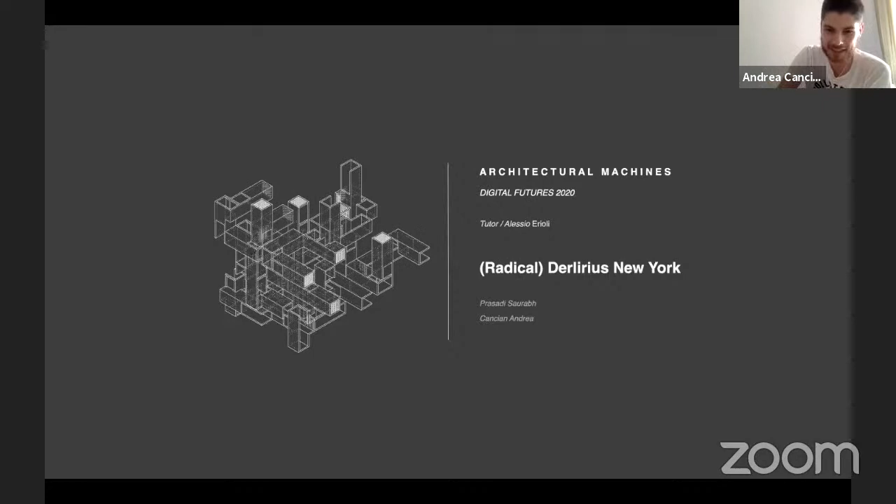First of all, the title came from a book written by our dear uncle OMA, aka Rem Koolhaas, and as we developed a radical approach to the city of New York, we opposed this name. It's just to remind everyone that we are working there in a radical way. New York has been taken as a testing ground for many experimentations, mainly in the 20th century, like Le Corbusier or Superstudio.

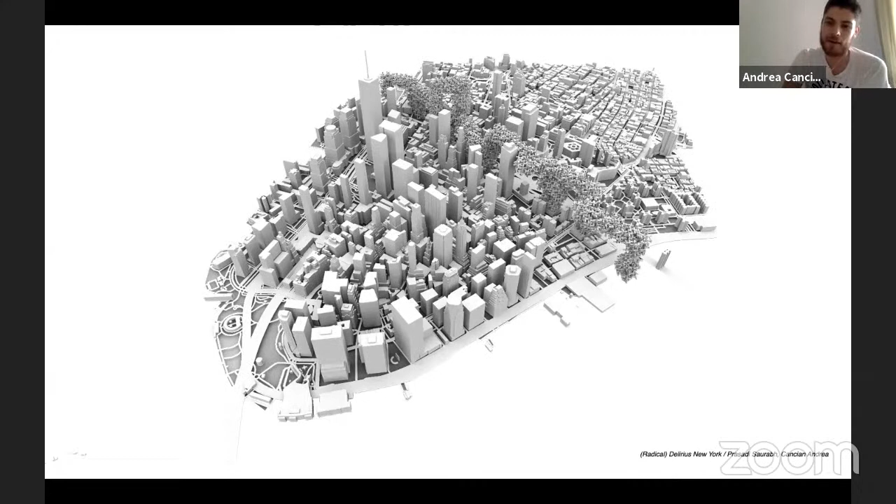We took this occasion to develop something on an urban scale, a very big urban scale, trying to create this superstructure that has been able to flow around this part of Manhattan, actually the arrow of this island, with a module based on a flat scale. This follows a specific path line and a bounding box that we created, taken as an example of the Superstudio shape.

This is fitting on the top of the building or in the water, and at the same time also in a free area of this part of Manhattan, respecting the pre-existence and going around, never colliding with it.

So as I said, we developed this superstructure following two things: a vector field direction, vertical for the legs and horizontal for the upper displacement, and a 3D complex polyline for the main direction.

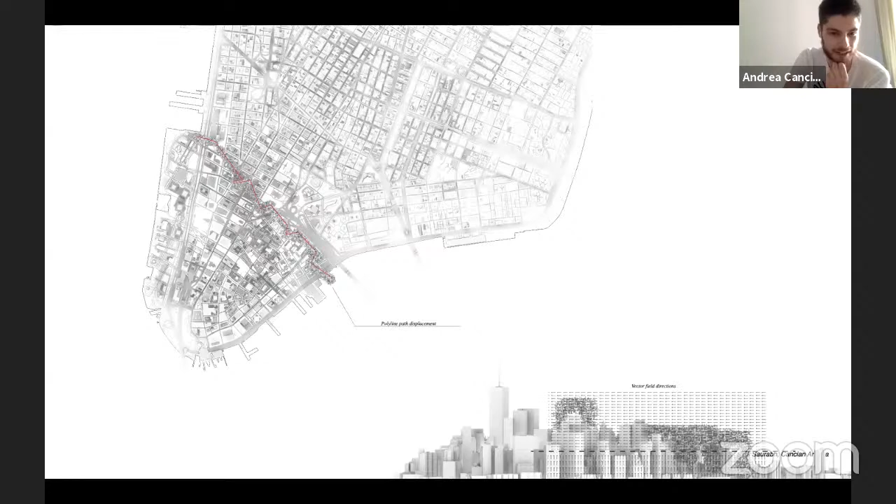These were the three main modules we used, two for the main development, and the last one is the post-production element. We just added some ceiling and vertical closing to this enormous habitat. Actually, as you see, we reached almost

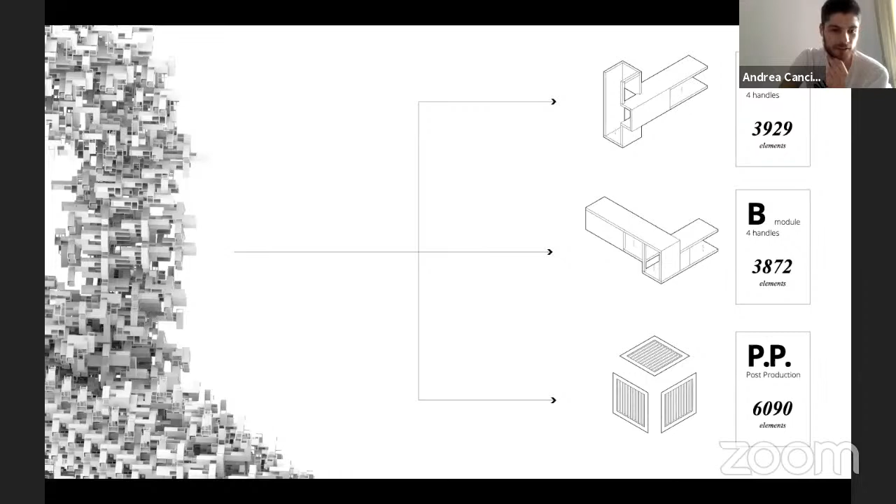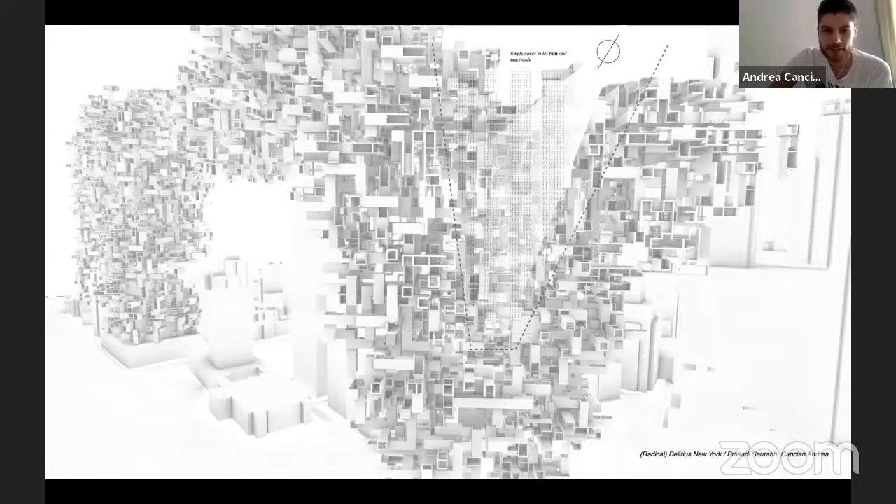it was still able to develop this kind of structure. We also worked with a cone void inside the structure to let the rain and sun pass through, or at least get in, as the density was sometimes too much for the inside element. These are just views that let you understand the scale of this module and of the superstructure in general. All the cubes, the starting element, was a cube that has 4 meters per each direction.

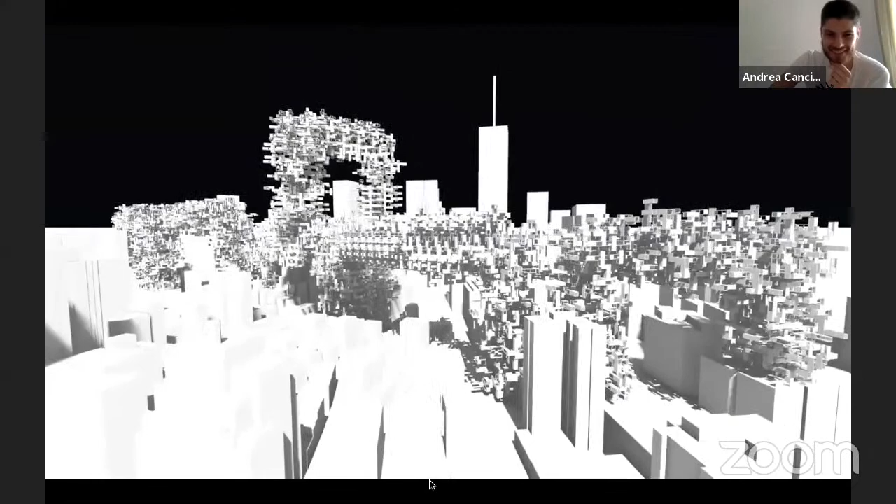So that was all, and this is the final video, a fly through around this beautiful city. Because of time problems, we were not able to develop a better video with music, sounds, effects, and birds flying, but we still like it. Okay, thank you very much.

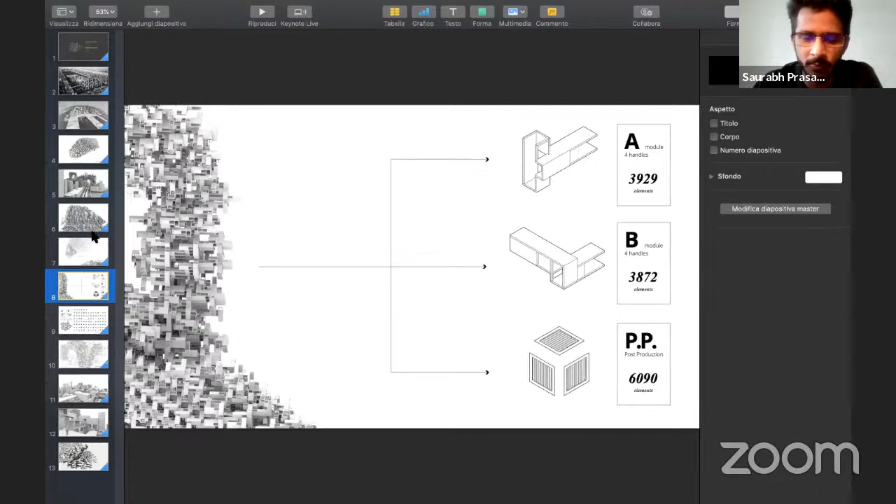So we placed a rule that we wanted to place only the post-production elements based on the directionality of the component that you selected. For example, right now we have those placed only on the right side corner of component A, and also the right and left side of component B. The rule was based such that only on the horizontal components would we have some kind of enclosure. And the vertical components stay open. So this was the only post-production rule that we managed to apply at this point.

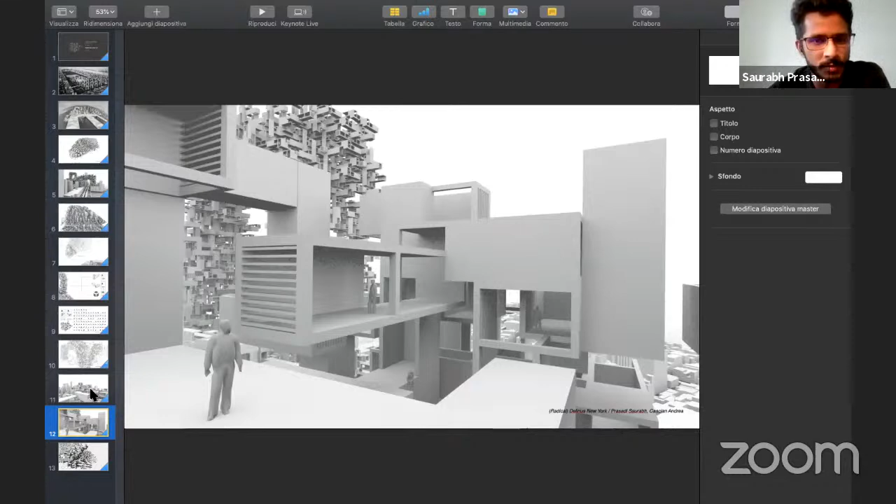The other intention was to cap the tops based on their position on the curve that is running through the heart of the city, but that is still under construction. We are not quite able to get to the point where we apply it on the superstructure.

Okay, well, very interesting work. I was expecting a completely different scale, so I was impressed by the type of project, and I think it's an interesting vision of a city. I wanted to ask more information about the strategy you used in order to populate those modules inside that area. I understood that you are using a polyline for defining the specific area, but then you mentioned two vector fields, one horizontal and one vertical, if I got that correct. Yes. And one is affecting the generation of the vertical connection and the other one the generation of the horizontal. If you can elaborate a little bit on how those vector fields are affecting the creation of the system.

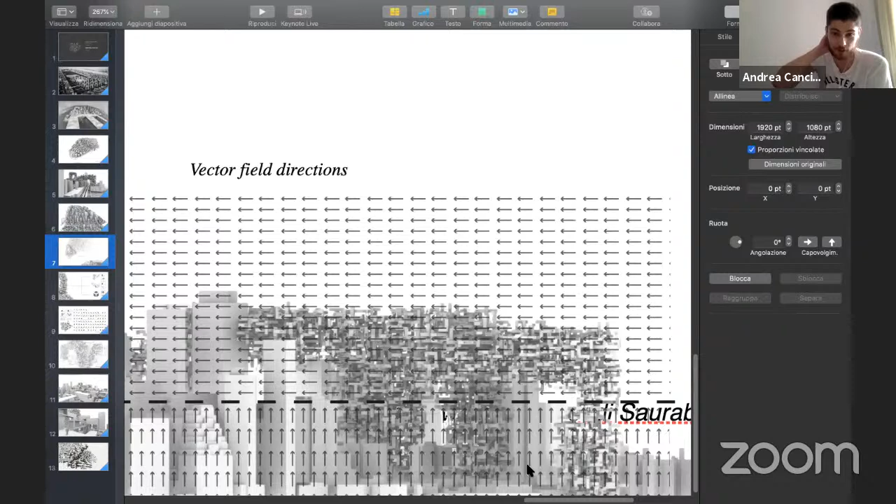Okay, now I see. Sorry, because in the presentation, the vectorial graphic didn't appear in a good way, but I think the image explains it enough because I don't know what else to say. Actually, it's just like this: from the bottom, one vectorial field goes up until a certain level where the legs start colliding with the polyline, the horizontal part of the polyline, and then we change the direction of the vector field to horizontal to have a better development of this module, as they work better in the upper part horizontally instead of vertically. The intention was quite simple, as you saw in the slide where you see the context and the controlling points.

Here, this? No, here, this one.

The intention was simple: wherever there are more neighboring vertical elements, almost in the central part and around the legs on both ends, we tried to apply vertical directional vectors, so the feeling on the ground is more directed towards the z-axis. The more you go to the flatter part, like the whole bridge, there we applied the horizontal one.

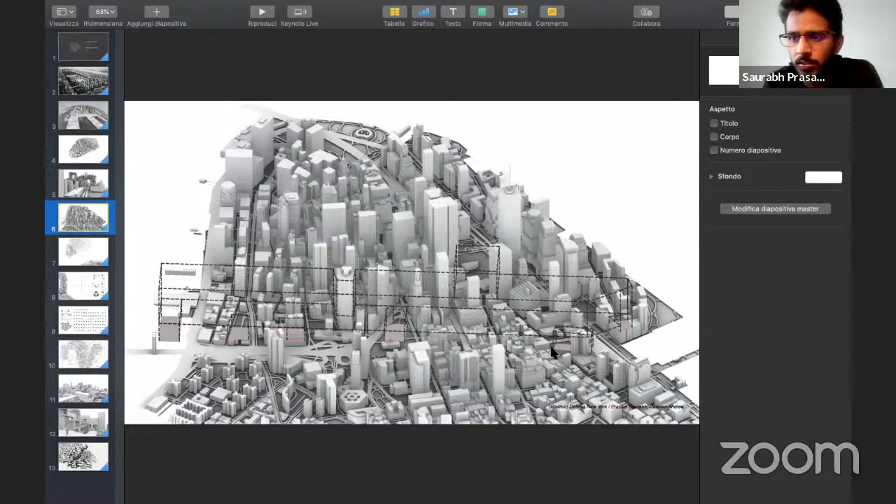So on the superior part are there only horizontal elements? There is of course a contribution of both, but we tried to place the rule of more horizontal on the superior part. Okay, so it's a kind of affecting the quantity, the percentage of different components that you have.

If I may intervene to complete the answer and give information to the guests, the system can be affected in many ways. It grows iteratively, assembling one component after the other, but then you can affect the choices the system makes using scalar and vector fields.

The scalar field tries to place components in the field, which is distributed in a three-dimensional space. With the scalar field, you try to place components as close as possible to the threshold value you feed to the system, so you go for ISO values in the field or as close as possible to those. With the vector field, you try to select the component that is closer to the direction of the vector field at that point.

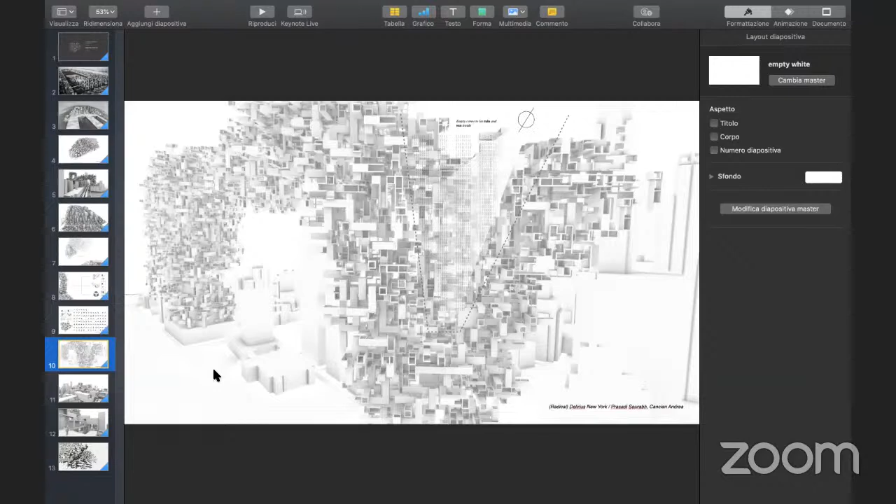So really, placing a horizontal vector field means that the system... we lost Andrea, I think. Well, he will try to join again. It means that the system tries to comply as much as possible with this need for horizontality, but it doesn't mean everything will be horizontal. That depends also on the rules that the system has for growth.

Just to complete the picture of what they have to do. No, now it's completely clear. Sorry, it was not intentional. Yeah, no, don't worry, Andrea. We trust you, Andrea, don't worry. It's fine. I think it's a different project. No, I think it's a very interesting object.

We mentioned the time constraint that unfortunately we all had during this event, but I'm wondering if you see further development for this object, if you got some ideas that you weren't able to do because of the time limitation, if you have many ideas.

The foremost thing was to constrain it on the topmost members. Right now, all the members—the unit on the middle, the unit on the bottom, the unit on the top—they are just copied the same. We still want to filter out the member on the top to have some kind of special treatment. We're still trying to figure out what kind of rule we can apply for it.

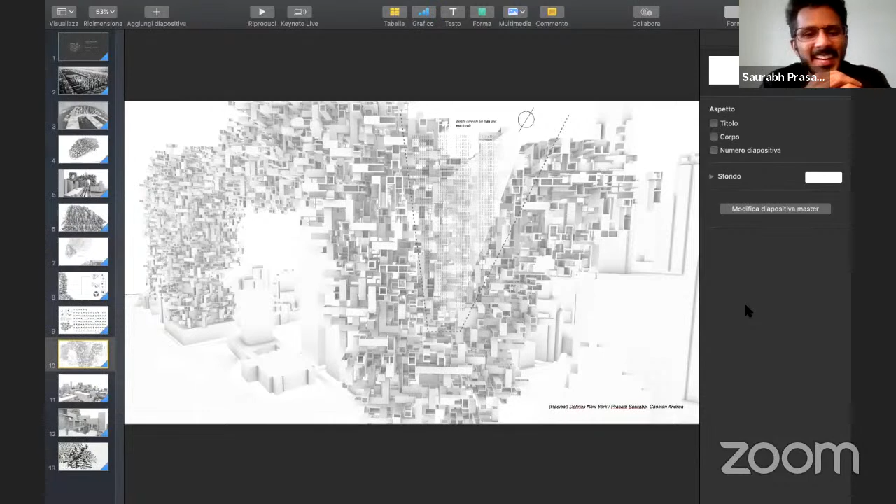Apart from that, we would like to have more constraints in terms of the positioning of the legs, so it's not like a ballerina with a lot of legs. You mean the main connection with the ground? Yeah, we would like to add more where it would be feasible. Right now it's sitting on top of buildings or in a park—we would like to find more opportunities.

And at this point it's also linear—perhaps it would be possible to get it flowing in different points in the city. Interesting.

Thank you, thank you. I think it's a very interesting and challenging work, because as Alessandro was saying, of the scale of course. So I had a few questions.

I wanted to know first if the kind of loop we see on the top left was intentional, or if it was something that emerged from the growth. The top left or in the center, you mean? Go to slide 5, yeah, top left of this slide.

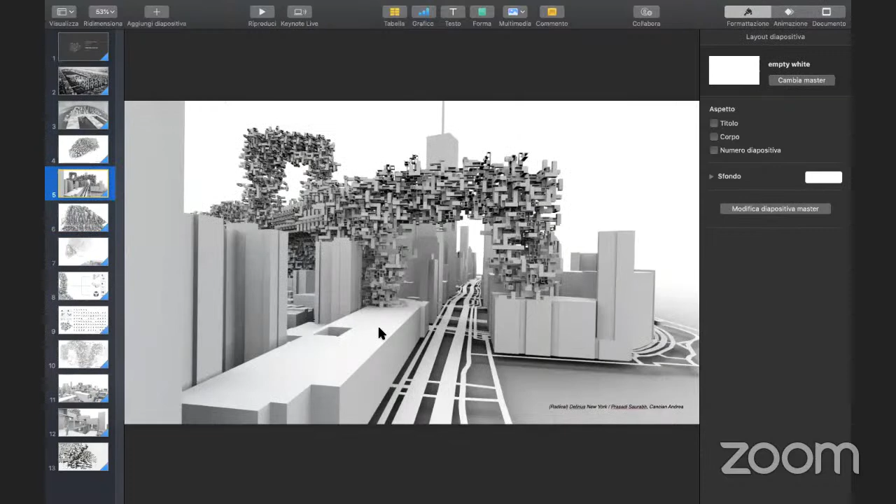When we saw the city as a whole from the aerial view, it was quite evident that this is the point where most of the high rises were turning out to be, and we wanted to respect the skyline of the city and go along with it rather than trying to oppose it with a low rise. Yeah, perfect—in the elevation it's very, very clear.

So in this slide, we see there's a polyline which gives the linear orientation. I get this, and I also got the influence of the different vector fields, but I don't understand how your structure evolved into this kind of arch in the middle. Because it's a 3D polyline. Ah, it's a 3D polyline, okay.

Yeah, okay, so maybe in this case you could show an elevation of the polyline as well, because it's not extremely clear to me. I could have done it, yes. No, just an advice. No, that's interesting, it was just a detail.

So maybe moving on to something more about your actual speculation on this. In your images, you show something more in programmatic terms. It seems to be more like a massive housing project. But you're also referring to SuperStudio, which, as we know, has a kind of absence of differentiation. It's interesting because in your project you kind of achieve maximum differentiation with a minimum number of elements. So I'd like to know your position on the function of this building. Do you see this primarily as a speculation on a massive housing system, or could you see it as a kind of micro city embedded? What are your goals for further development on this aspect?

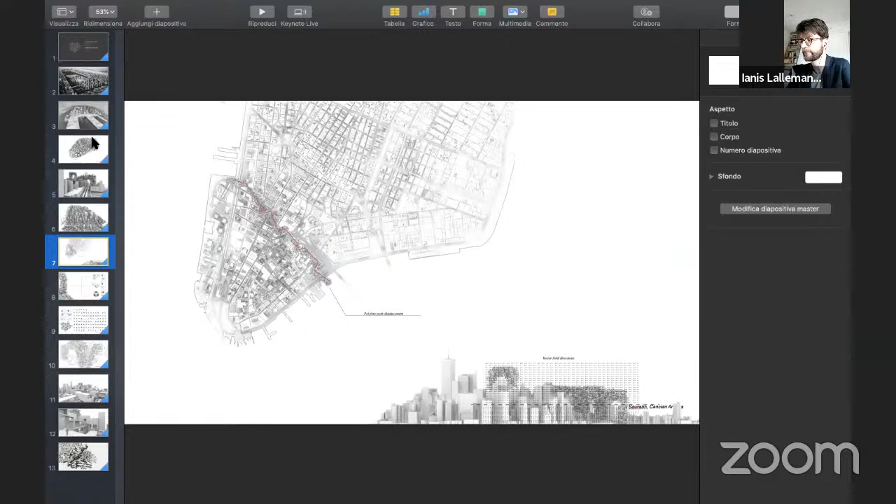The choice for New York is totally provocative, but in the near future we are going to end the spaces to build, and we're going to be like 14 billion people probably. So we wanted to develop this strategy in this provocative way, because maybe in the future we're really going to need this -- almost favelas with a mathematical order, because that's what it could be.

It helps you develop big scale elements. If you want to build it, it's going to bear some major problems. But if you think of a scenario where you're going to have population problems and not enough places to place them, that was our provocative way to show it.

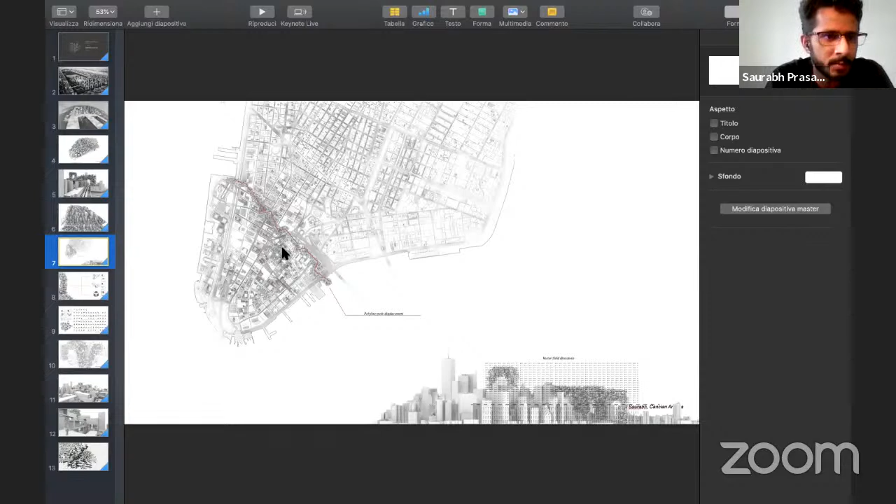In terms of usage, we foresee it having a strong character for residential and office use at the moment, because no matter how dense it gets, it's quite porous. In the 3D view or perspective, it's quite clear how almost every unit is able to get light or access some way. Here he's shown rain falling from the sky, but I think porosity is the strongest character it retains even after being so dense.

This is interesting. I'm wondering, of course understanding the limitations, and this is already pretty impressive work for a one-week workshop, but I'm wondering if you could achieve further differentiation in some areas, maybe by post-processing the components, to play on the opportunities you have with porosity -- maybe some kind of platform zones. I feel this project has more potential as a kind of contained living environment than as a massive housing system.

So you could probably try to embed more programs in a sense -- office, housing, but maybe also platforms or areas for circulation. I know you've talked with Alessio about tools to analyze the path, and that could probably give some insights about how to develop that. But those are just suggestions. Again, congrats, this is pretty impressive.

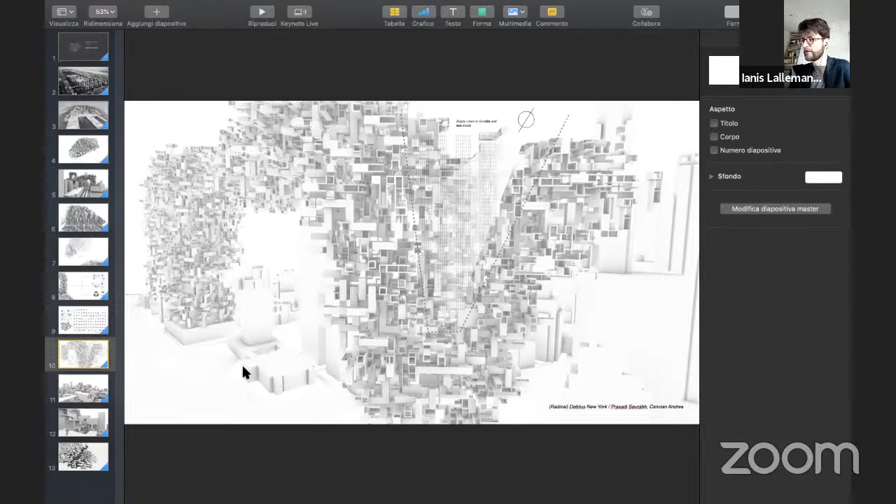It's good you show this reference, but you could exploit the theoretical part of this reference more and connect it with the issues we might face in terms of housing crisis and densification. So I think there's also a lot to develop on the theoretical side of your proposal as well. Very exciting.

If I may pitch in, I think it's a very interesting discussion on the project. We didn't have much time in the previous days to dig into the premises and the intent of the project. Nonetheless, I'd like to say a few things that are important before moving on to the next presentation.

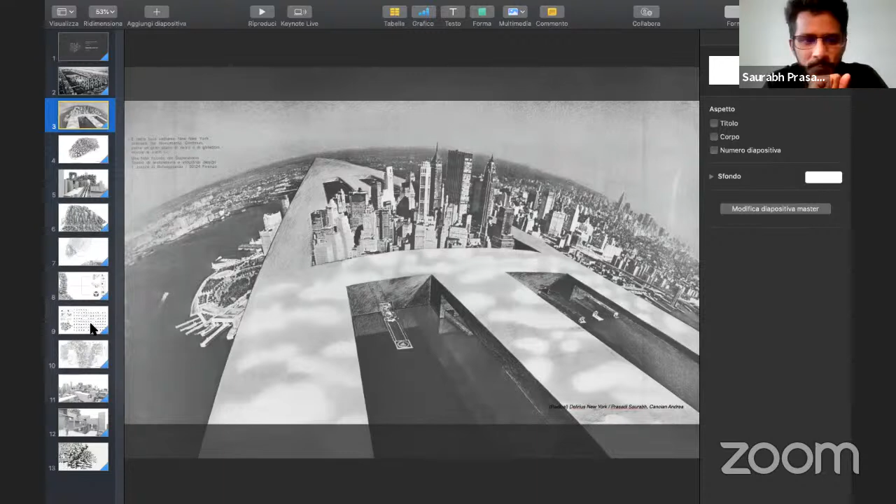Remember the distinction I talked about on day one between unit and component. That's exactly the step away from modernity. I like the references, but you have to understand they are the past. No matter how radical, they're still a proposal rooted in a philosophical and architectural view that belongs to the past and is not to be resurrected.

Of course you have to learn from it, but the fundamental step away is the concept that modernism had of the functionalized unit: one unit of space equals one function. In our case, what you are using are components.

So what Ianis was suggesting is actually something I would have suggested as well: resist the temptation to assign a function to that component from the very beginning. Look at it, because that's a component, not just a modular unit that composes something made only of the same properties. When it combines, it creates spaces that acquire different properties, because the aggregation is open.

So even the qualities and properties of the spaces you're creating are open. And they're open not just to seeing this as massive housing or something, but something that could be entirely rethought, even in terms of what you understand as function, as related to your lifestyle.

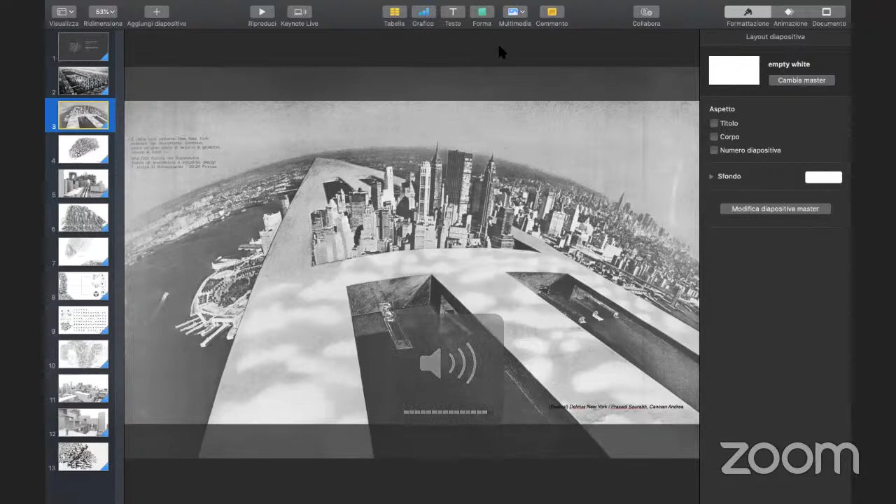I just wanted to add another piece of information for the guests: the scale of the project isn't going to be the same for all of the projects. I actually had something in mind at the beginning of the workshop, but I preferred to leave participants free to steer the instruments they were given towards more personal goals. So you'll see a different range of scales and scopes within the various projects.

But I think it's also more interesting, and I was curious to see where this same approach and process could go if applied to a different range of scales and scopes in themselves.

Coming from the architectural scale of voids, we're talking here about designing not only from the outside, from the mass, but also from the inside, from the spaces which are coming between the walls, the interstitial spaces, or the rooms, or anything which is within.

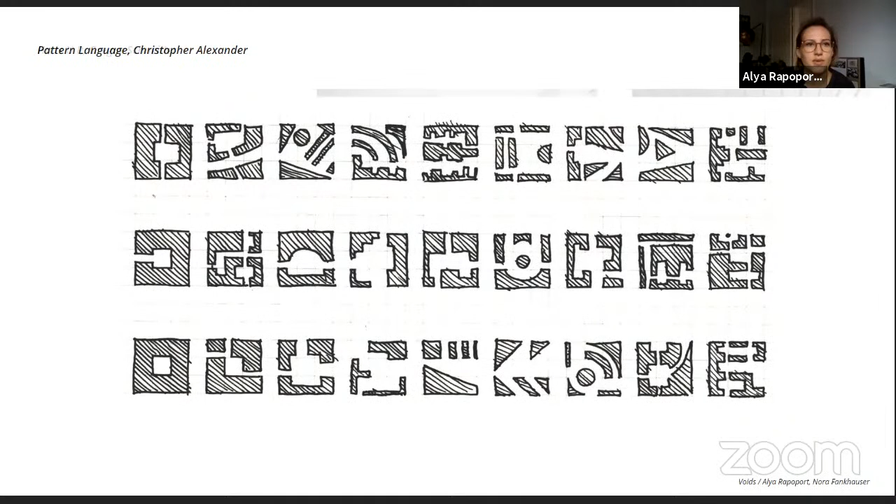As a reference, the Salk Institute by Louis Kahn, or the widely-known pattern language, the seminal work of Christopher Alexander, or on the art side, Haus u r from Gregor Schneider, which he developed to have one layout on the inside and another layout on the outside, creating void spaces between the walls and a feeling of uncanniness being in the spaces.

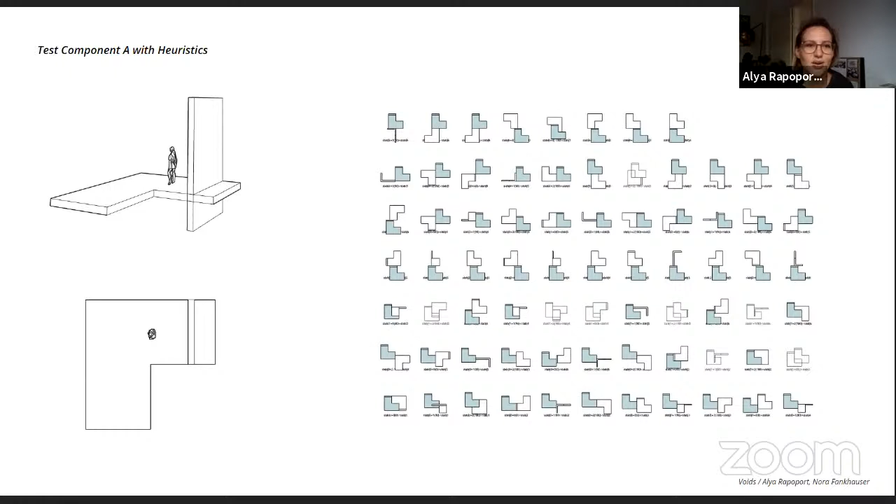So we took that idea of designing from the void and started to experiment with components and heuristics. First we thought maybe we'll start with a component which will contain the void as an outer shell. Our first test was component A, which would create smaller spaces on this side and bigger spaces on this one. We did a heuristics test and thought maybe it would be better to create a second component B, which would work very well with the first one.

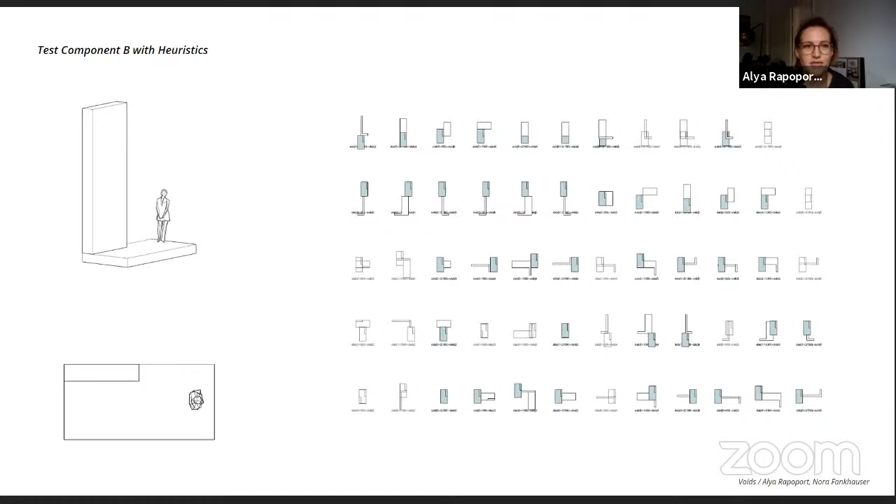Here are the first connection rules that created these nice ideas, not only of void spaces, but also spaces which create a kind of window, a bit more Le Corbusier style, looking outside and seeing through the whole perspective of the space, or seeing that there's a dead end and making it even more curious.

So our first assemblies look like that, based on the occupancy or the sequence.

Then we came to the problem that it was a bit hard to define what is the circulation path if we're going with an element which looks rather from the typology of the slab. So we decided maybe we can create a negative form, a form of mold, and try to create the voids from within.

So we took the first component that worked for us and inverted it, looking at the different heuristics that came up, trying it within the environment in an urban setting, coming back to the notion of how these parasite-like void spaces will actually fill the voids between the first and second rows of houses, with the constraining box of the block and the buildings as obstacles to move around.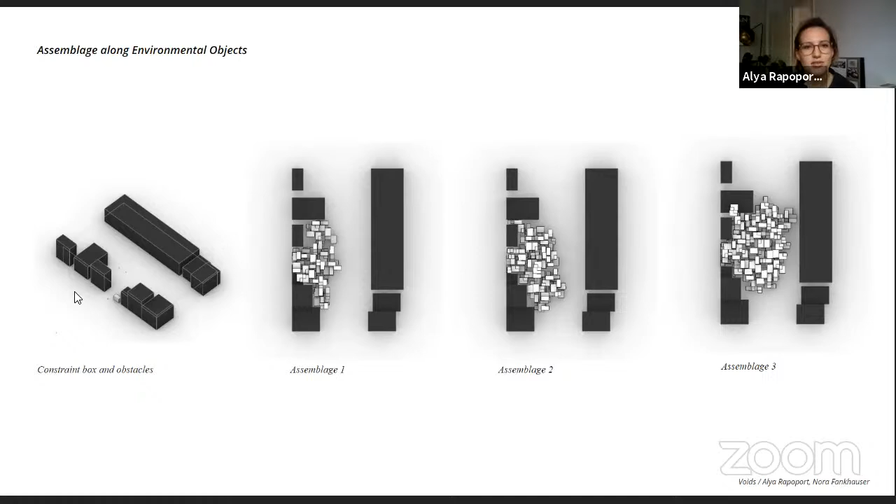Then we tried the circulation curves within this block, but didn't find a really well-working approach for us. We tried a different analysis of the shortest path from one space to another across the different assemblies.

Finally we came to the final aggregation, taking component A with the handles and the circulation path that we intended to have, and creating a void or a box around it. So for our simulation of the circulation spaces, we used the box, also known as a BB or bounding box component, and for the visual aesthetics and seeing how the space would look, we took component A.

This also brought some challenges. First, we took the heuristics of component A, manually picked the ones we thought would be interesting to create nice spaces, and then translated that to these bounding boxes.

From here you see it's a bit hard to define or determine which ones will actually create something valuable.

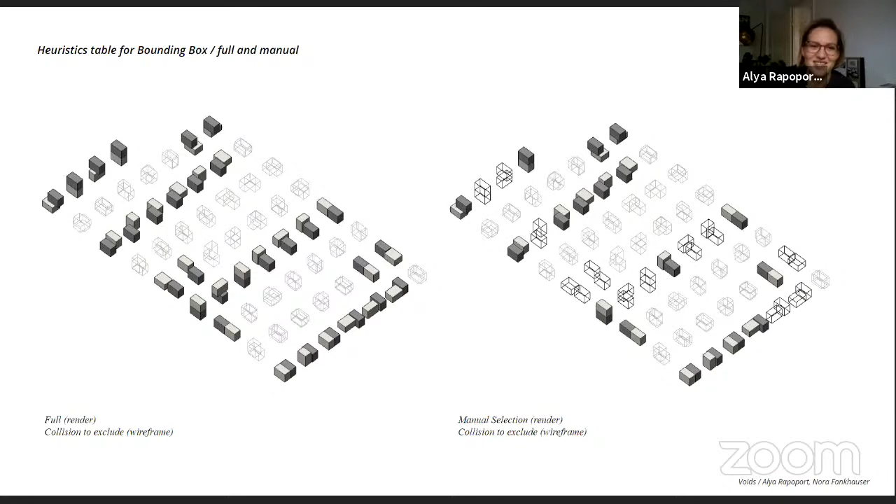From here we went further into the environmental space and tried different assemblages to see how they would behave on a smaller scale as a house, or a bigger scale as part of the blocks, or something in the middle. We analyzed that the difference between free handles and included handles also depends on the surroundings—if you have more houses around, more of the handles are not free but actually occluded.

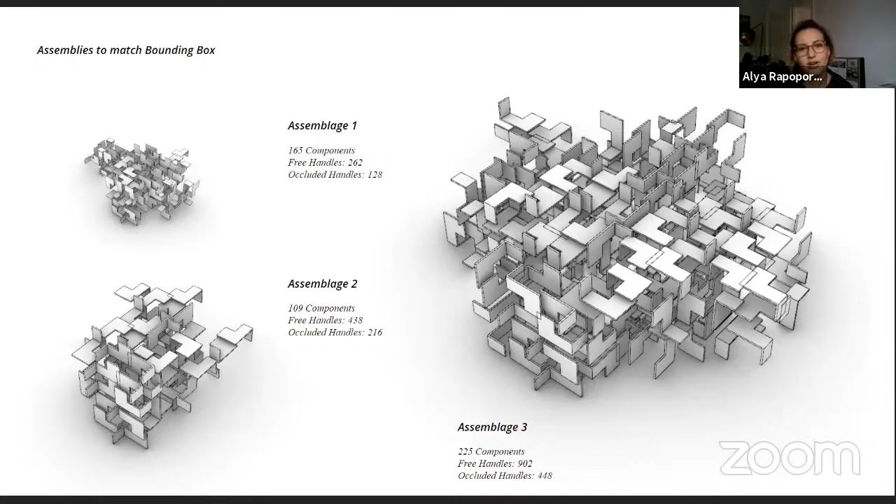Here are assemblages number 1, 2, and 3. They are not iterative, but it would also be interesting to see how an iterative approach in the assemblies of these building blocks would look in the future, or with other constraints of the urban environment.

Here is a short GIF of the options.

Then, to analyze how the connection between these void spaces will function and look, we came back to this component BB, taken with the same heuristics and the same assemblies. We looked at the circulation paths connecting the points at the extremity of each of the boxes.

Here are three of the examples of how it looked. We found it actually super interesting and would be very excited to continue working on that and seeing what we can do with the spaces.

And here are the views from the inside, how that might look on the scale of a person. Some spaces are super big, some are more narrow or smaller—maybe that would be interesting in creating an impression of vastness versus a pressurized environment.

And here is how I would imagine it looking when somebody is passing by and sees this enormous structure. Maybe it could be covered with an actual facade so you don't see what is inside, and only when you enter do you come into this Alice in Wonderland style labyrinth. That's it.

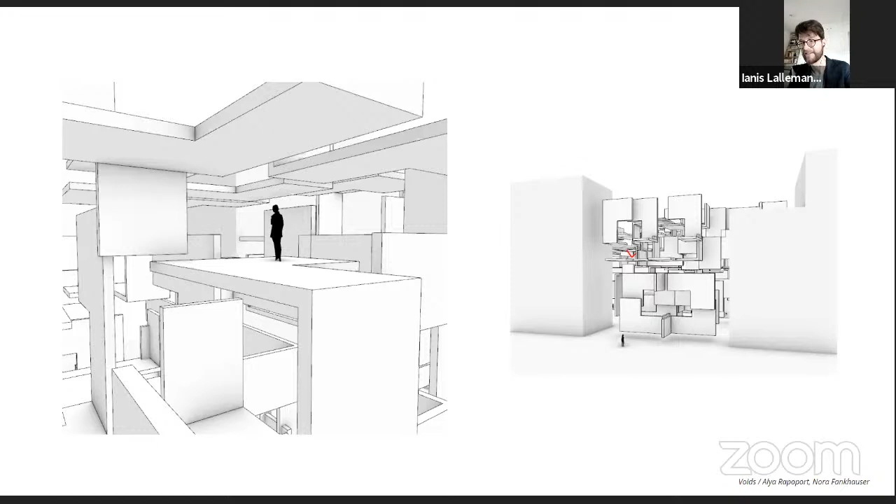Thanks for the presentation. I think it's a very interesting idea to start from the notion of negative space, and I really liked your idea to think of components as positive and negative duals, so that they can work in tandem.

My question is more about the workflow you eventually choose. My understanding is that you're setting up the heuristics exploration with your final components, but then you go to bounding boxes and make the assembly with bounding boxes, and then you go back to some kind of component. Could you elaborate on this part where you introduce the bounding boxes, and why eventually did you choose to do that?

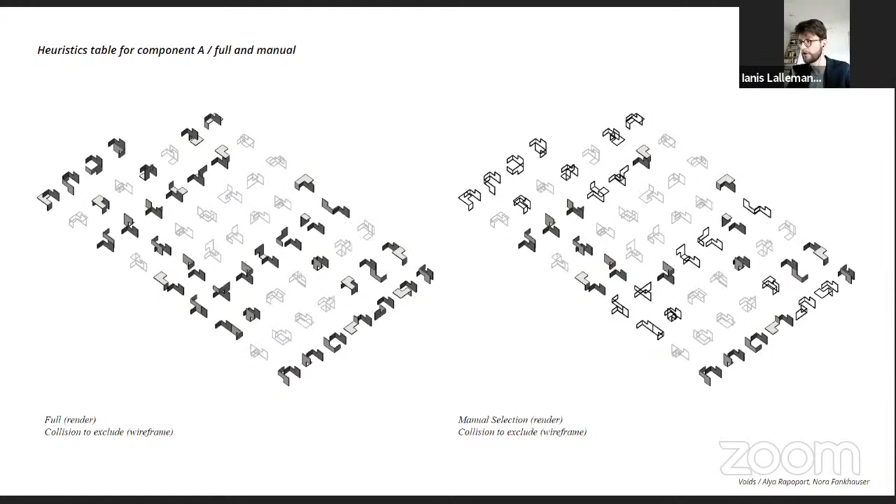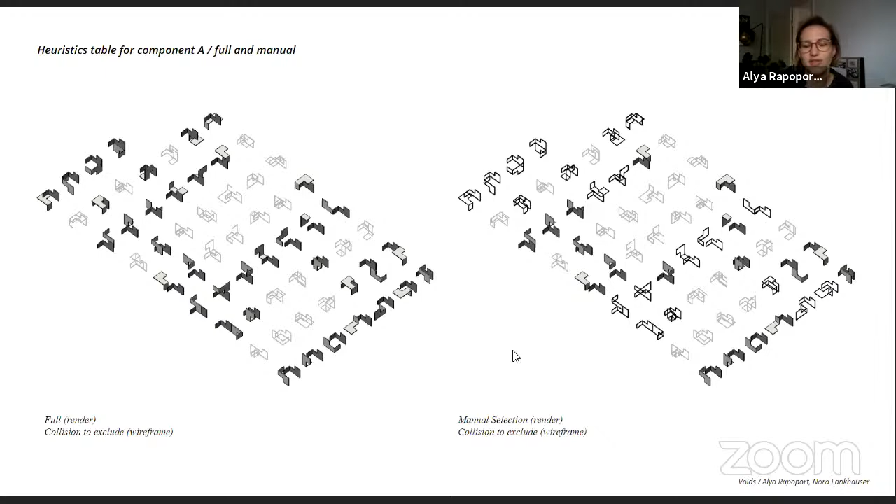Eventually, we faced the problem that since we're creating from the inside to the outside, from the void, we wanted to also see how this void would be connected and which circulation path or exploration path it would take. But in the current setup, the script was not working on a slab mode of the space, meaning we could only do the circulation path if it went from handle to handle, but within the bounding box.

If we're going from the component, which generally looks like a slab, and the handles are more within the space, it didn't connect the way that we wanted. So we did the work twice: we did the assemblage with the actual form that we wanted, but to analyze how people would be moving through, we had to use this bounding box.

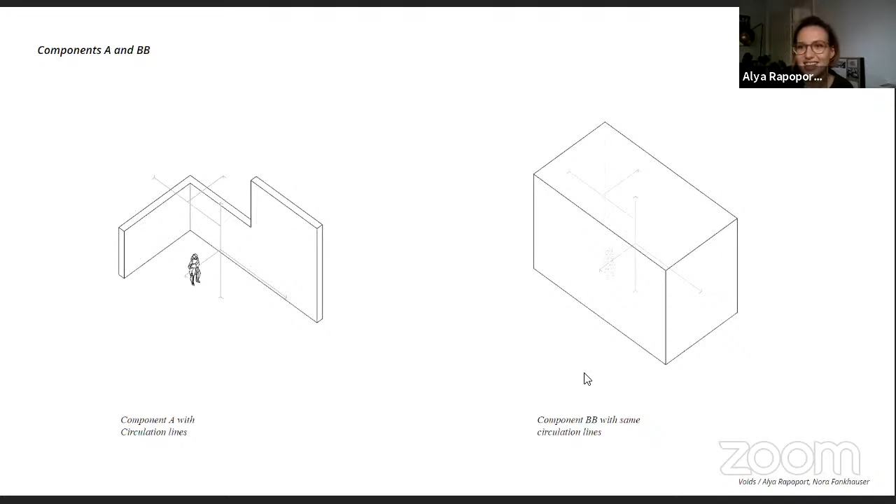But this is actually a super interesting thing that I would like to see develop further, how when we have something that looks like a wall or a slab or this weird flat element, the circulation lines can be adjusted or put into the space according to this element. So this was just a technical restriction we had to follow.

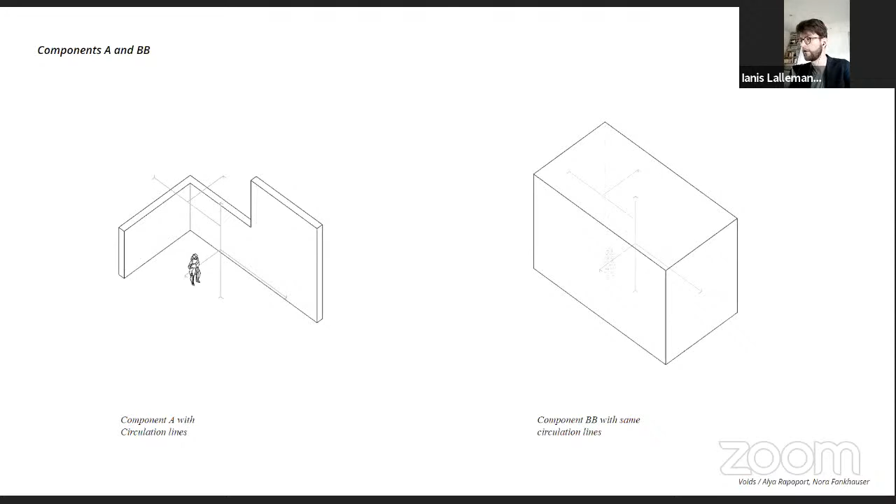Right, but in this case, my question would be, why didn't you start with bounding box modules, explore the heuristics for these modules, and then afterward replace them based on the circulation with more slab-like elements? What's not clear to me—correct me if I'm wrong—is that you generate heuristics for hollowed forms, and then you move to bounding boxes. Wouldn't it be more effective, conceptually and technically, to explore the heuristics with the full elements first, and afterward hollow them or introduce a differentiation? But then you can't predict what it would look like.

We had this in one of our presentations here. If you work with the voids only, then you don't actually see how the connection of the parts will look in the end, and whether the form will be aesthetic or not, in the way that you imagine it to be.

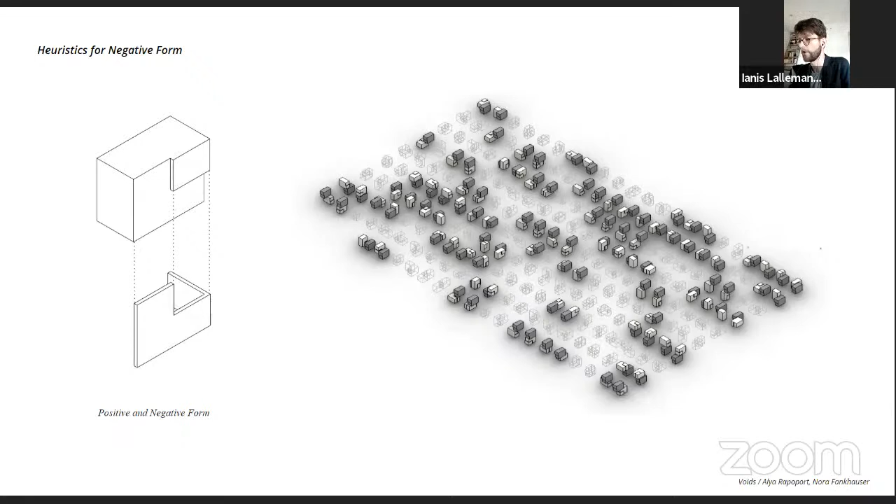No, but I'm especially referring to starting with full elements like this. It seems to me, and maybe I didn't understand it, that you didn't do the heuristics exploration with this type of element—you did it before with the slabs, and afterward put in some bounding boxes. So my question is, why not start with the boxes, explore the heuristics for that, which is also safer for handling collisions, and afterward replace them with some elements? You could always run a small simulation to see how that would connect.

Coming from the void, our intention was to use the one—if you go to slide 20—we had more interesting iterations with the aggregation of component A. So if we used the same heuristic for the bounding box, and then analyzed this, we could not come up with interesting connections.

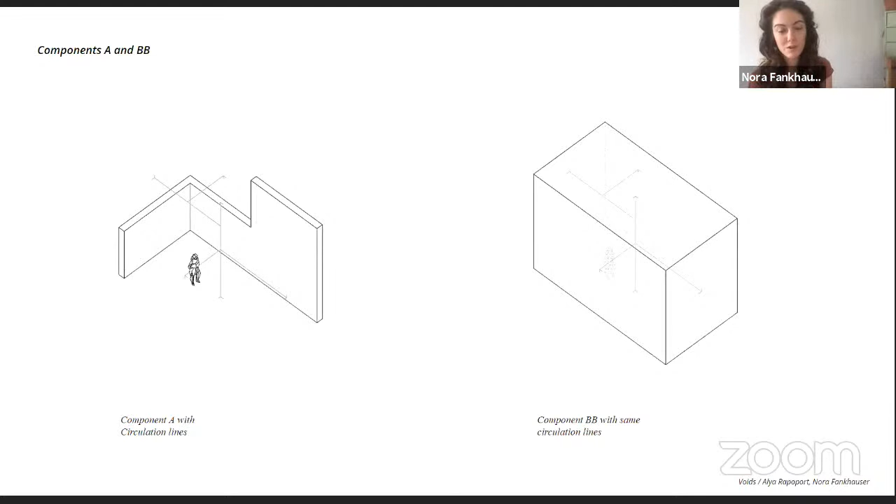So that's why we choose to start from this, to see how these two components combined would actually build another space in between, and then move on to the bounding box, because the bounding box was just a technical issue we had to follow in the end. If we would have chosen the connections from the bounding box, I think you see this on slide 20, the combinations for the two bounding boxes were just not interesting enough for us. So that's why we got back and forth in the end.

But can't you have connection issues? Because if you don't, and that would be my last point, I want to leave the floor to Alessandra as well. But I mean, for me, I think I really understand the process, and that is related to your idea of working with positive and negative forms. But I find somehow there could be some issues.

I mean, intuitively, if you take the heuristics that are computed and pre-selected with some lighter elements, and keep the same exact heuristics for the bounding boxes, I don't think it will always work in my understanding, because the way the system works is also removing the parts that don't intersect. But because those parts are much lighter, if you go with the bounding box, you could have intersection, I think. So it's just that you could keep the same idea, but I think it's also related to the way you work.

So you started with this initial idea, then you faced an issue, and then you replaced them with some kind of bounding boxes. But maybe now that you have more time and you can take a step back, don't start with the hollowed element, but start with the bounding boxes. Of course, you know very well that you are going to end up with the elements. But sometimes you need to restart from a fresh state with a new strategy.

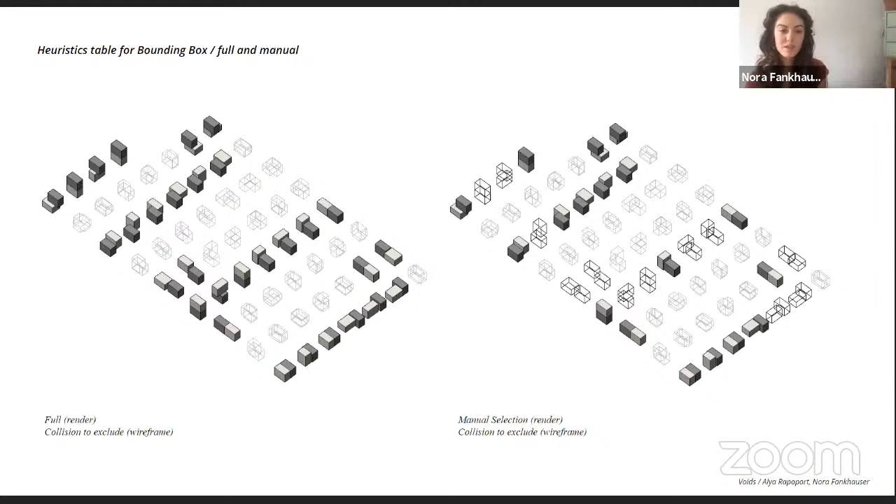Yes, I totally agree. That would be the next step, also to analyze more in depth the circulation path, if it works or not, and different aggregation, radiation. It's interesting that you added the layer to the component itself, and somehow this gives some information. But at the end, probably something else should happen in order to make an evaluation that considers also some possible emerging effect or behavior.

Yeah, that's a very interesting topic. They had some bumps along the road, so they had to go back and forth quite a while. This is why the appearance of the final level of development might appear a little underdeveloped compared to what we've seen before, but the process and the intention were always focused and spot on all the time. I won't go into the questions that Ianis asked, but to me there is still a bit of confusion in what you did with the bounding box, but let's not talk about it right now.

I think the interesting thing in your project would be exactly that challenge we were talking about between yesterday and this morning, which is how do you capture emergent organizational qualities when you start building up. It means recognizing semantic categories that do not exist yet, in a bunch of words. So how do you do that?

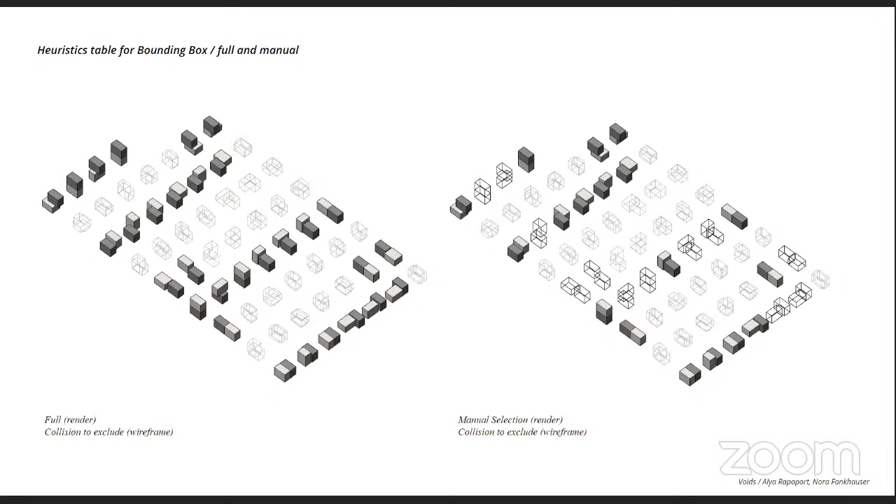We're trying to find the circulation that your component engenders when it creates assemblages. But with a simplified version of the problem, there is something that can be done: building a line network and then working in trying to do something with that line network, also introducing feedback aspects. This is actually one of the things I would have liked to have fully developed before the beginning of the workshop, but I couldn't, unfortunately. I think you already had enough on your plate to work with, still with the strategy we explored together the first two days.

So I think you were going in a very interesting direction. Coming to mention it, seeing the slides of the Salk Institute, just a last minute thought, but maybe instead of something that is that open, another possibility would have been to work in recursive pockets of voids, like a component that contains a pocket that has another void inside it, and see how you can reverse the situation between inside and outside, designing the component in a certain way so that whatever is the outside for one becomes the inside of another when assembled. Just a passing thought, but all in all, I think we've done a good job.

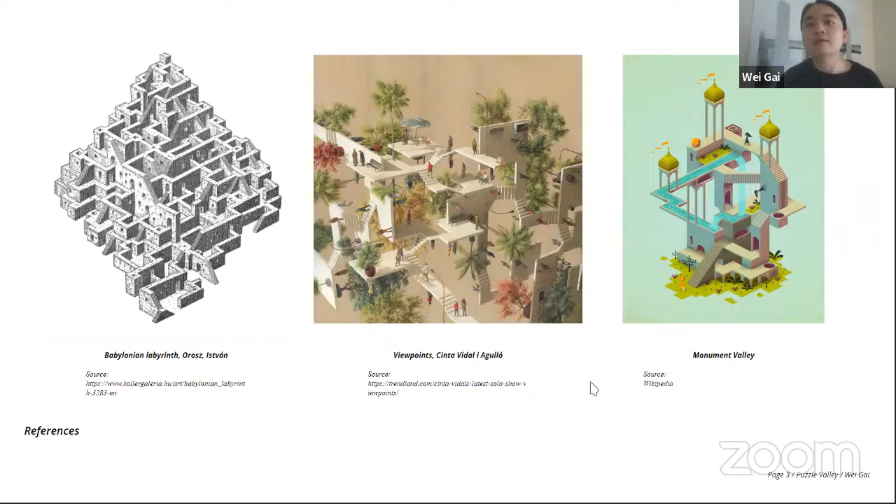So then it's my diagrams. First I will start with a component I made. From those 3 artworks, I tried to find what are the important elements.

So I found one is right angle walls, pieces of the walls, and another one is the stairs, which can be connected to the walls in different angles, and they connect together to make my second component. They collected together, as you can see from the right-hand side.

This is a possible single space made with walls and the stairs. Let me move to, okay, now you can see the page numbers. So you can see from this small single model the scales with the humans and also the stairs.

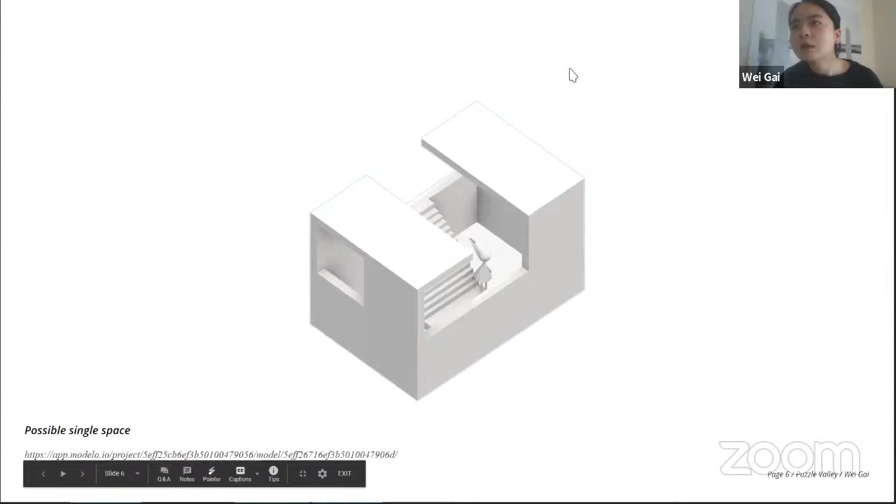So next one is post assemblage analysis and operations. I analyzed the connections of each part. I think I met the same problem as other groups, but sadly I could not figure out a good solution. So the analysis finally failed, but I tried other work to make this project complete.

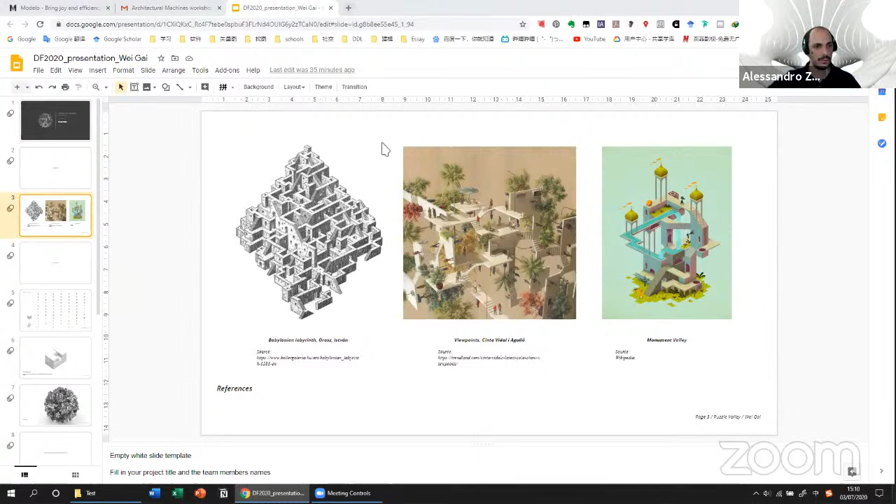So that's what I'm thinking about, how to connect its space and make the space more flexible. Because if you can go to slide 6, I think.

So if I get this correctly, this was kind of an expectation of how you saw those modules working together. But at the end, it worked a bit differently. So I'm wondering what would be a strategy for you to try to achieve more this kind of result rather than an over-occluded space like the one you got at the end.

Do you have, for example, some ideas in order to improve or develop further the design of your system?

I think this possible single space is closer to the large scale models than what I currently make in this picture. So this one is closer to my concept, which is like a space that can be connected to the open space and also have the closed space or private space.

Okay, thank you. Thank you.

Yeah, so I think I would follow on what Alessandro is saying. I think it's an interesting approach that starts from very artistic conceptions of space and also orientations. If you can go back to slide 7, I think.

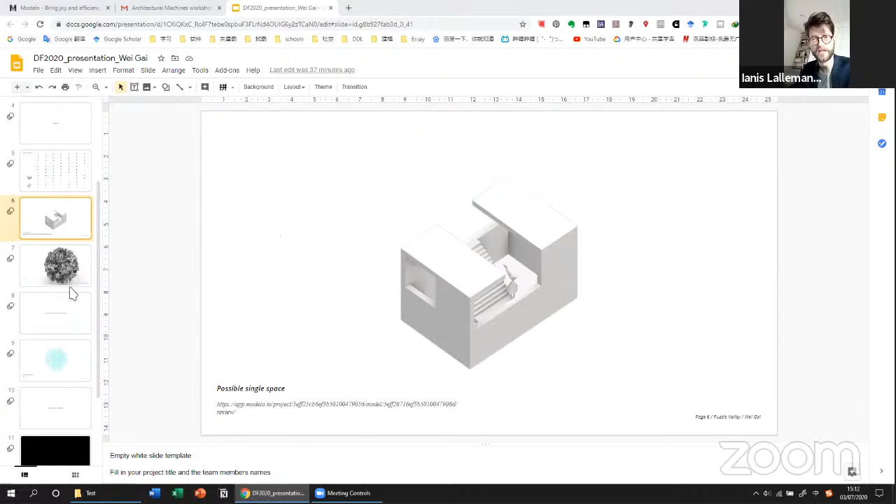Yes, thank you. What I think is also interesting is how, and that's related to what Alessandro was saying about the distinction between units and components, some components that might evoke stairs, in terms of typology, at the end in this kind of assemblage also become like column-like elements. So you have some emergent qualities that are interesting and could really be exploited. But it's true that you have a very compact organization.

So following up on Alessandro's question, I was wondering if the fact that you have a kind of sphere-like shape was intentional, or is it something you would like to change, introducing strategies like a field or some kind of guides to develop the assembly?

Well, I actually haven't considered this concept in quite detail, but your comments and questions just remind me about it. Well, I think this large scale model still needs further development.

As you can see, the stairs are not very clear enough. Actually, I'm trying to use these components to make a space, or the kind of space that can connect with the stairs, or also the stairs maybe sometimes can be the wall, can be the roof, in this large scale model.

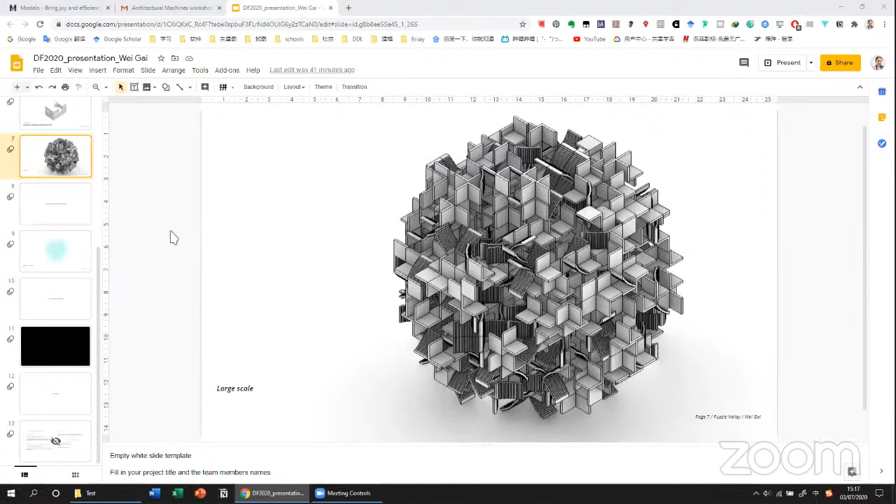Yeah, stop. Right there. It's okay, even here it's good. Yeah, maybe not where you have the blur, the motion blur effect, where it has a little bit more still. Okay, but I'll try. No, but it's okay, it's fine here.

What I wanted to say is that since you took out the curvature and made larger blocks, remember the thing we were talking about, how this element, instead of being functionalized from the beginning as a stair, it's a generic element. And when you orient it in different ways, it starts working differently, starts to emanate different functional possibilities.

So it becomes part of the structure when it is laid out vertical instead of horizontal as a typical stair. Or if you look at it from underneath, it looks like part of the completion of the whole structural object. I think that the kind of spaces you're getting in this video are a huge improvement from the initial hypothesis you were showing me just one day ago.

I think you realize that too, right? The result speaks for itself, at least to me. This one, I think it's just a matter of now having a little more time to work on being more selective with the rules you're using, the rules you pick out from the heuristics. But this is going on a very interesting path, I can tell you.

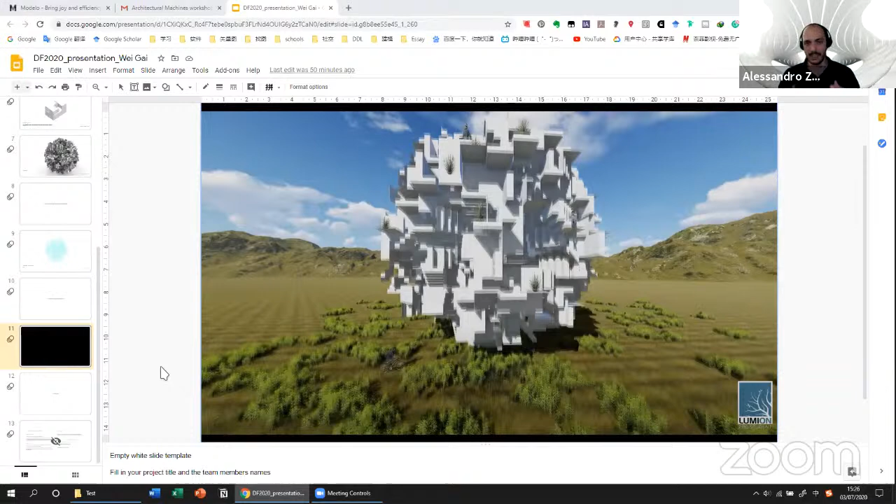I think the other object we saw before was quite more porous and easier to figure out what was happening. In this case, it's really a question mark for me, at least.

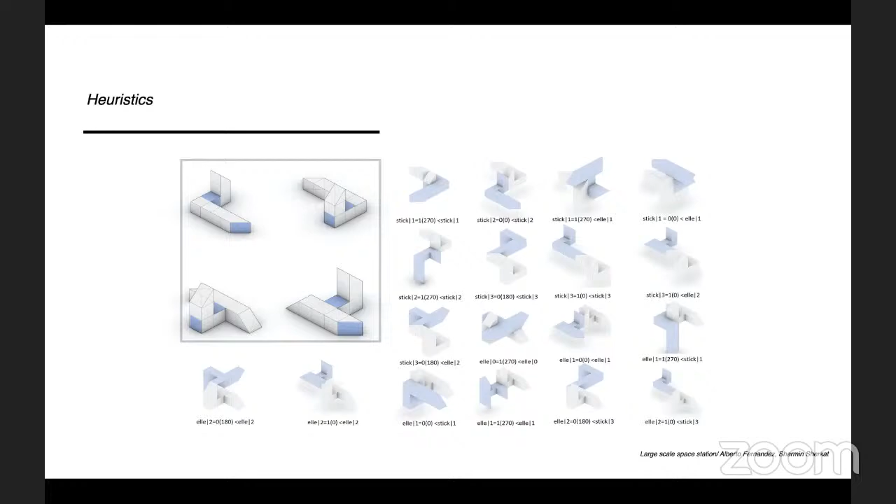All in all, the other consideration is exactly on the perceptual side. It would have been a lot more interesting to navigate this from within. I appreciate the view from the outside, but navigate it from within and see the space. Personally, given the spatial distribution model made of these highways and ramified, dendritic kind of result, it looks a lot to me like this has the possibility to be a space hub, where you have spaceships coming and going, exchanges of things. It's like a spaceport, something like that, because the structure is very much ramified and articulated exactly like an interchange, like a nexus of things. It's made for the exchange of things, this that you have here. So it could have been an interesting post-processing strategy to locate all the possible hubs and bays for ships to approach, and see, okay, then we have all these distributions, and analyzing the internal path, what are the most important nodes in the structure, have this sort of analysis.

That's cool. Can you go to the slide where you're trying to design the final geometry? I think it's the last slide, probably. This one? Yeah, this one. Can you zoom in on the object attempt? If you can, or otherwise leave it like that. It's not a big deal. Is it working? This one, yeah, leave it like this. It's okay, that's not the problem. Just a word of advice.

If you design something that is like this, actually, can you see my sketches or not? I don't know. Yes, yeah. So it disappears, I don't know why. I do a sketch and after a while it disappears for whatever reason. I can't see the sketches. Yeah, you can see it. No, I can't. Okay, because I am sketching, but then after a few seconds the sketch disappears for whatever reason. Okay, let me try again. Let's see if... okay, I'm not able to sketch. Now what I wanted to say is, okay, no sketching, I will just try to explain this vocally.

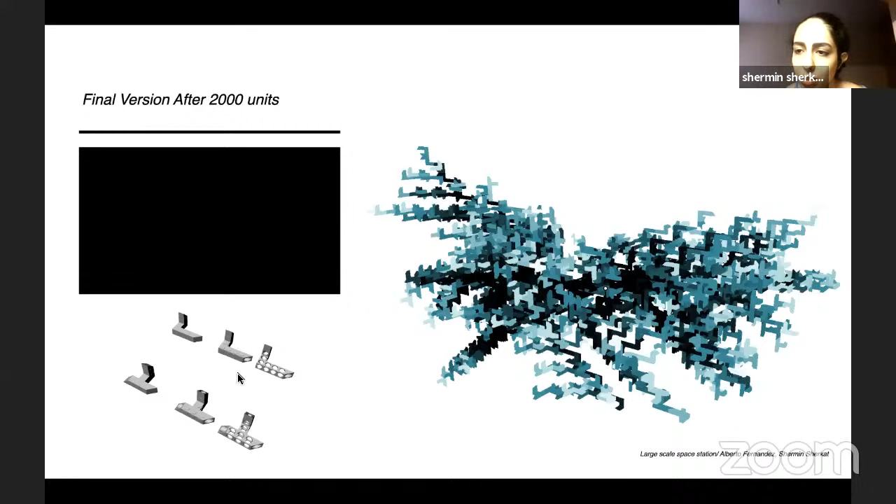So if you look at the Truchet tile example I showed you on day one, remember those patterns? They work because they're able to build larger patterns when you put one next to another, just by simple combination of rotations. But if instead you put a very recognizable figure right in the middle of each tile, you lose all that possibility to build larger patterns.

So if you put objects that are perfectly recognizable in themselves, in their figure, as your component, that object will always be a dead giveaway that you have a module there. It's like putting a flag in the module saying, okay, this is a module, this is another module.

So instead, if you work with something that connects to the connectable part of the object, like simple strip cuts that arrive at the connectable part, those strip cuts can connect to other strip cuts in the next component and form a larger strip cut, or something of that sort. So you cleverly work with the connections by putting something incomplete in the object that can be completed by the next object, if it eventually gets connected in a certain way.

So you work by combining connections to create larger patterns in the ensemble, instead of placing a recognizable figure in the middle. That's a basic principle of tileability, how a figure can be tiled. Instead of being the same, you just make the extremes able to connect to each other, while the figure itself can change inside.

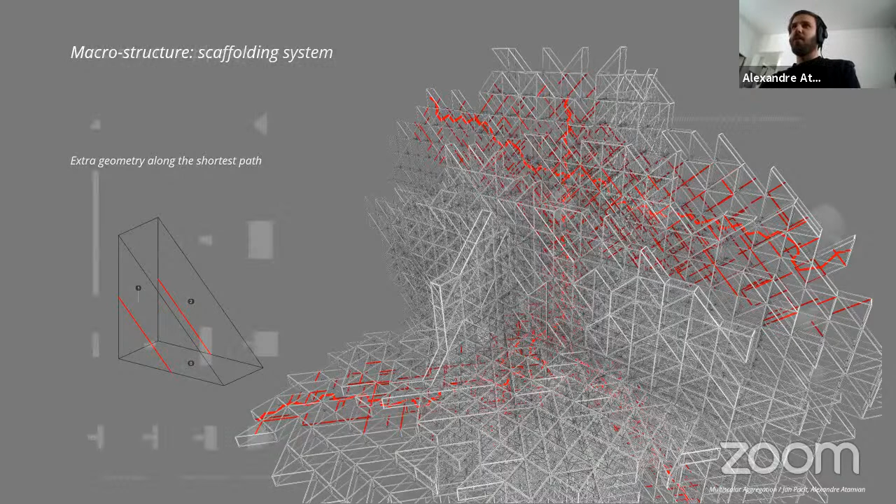So it was a transition between the two scales, between the macro and the micro scale, if I can say micro. The idea for this microstructure was to work with standard PVC pipes, which allow for some standard connections.

Here you see all the elements that were used, and just a very small sample of the heuristic. In this part of the project, I used three different sizes of pipes: one with a diameter of 10 centimeters, another that's double that, and the last and biggest with a diameter of 40 centimeters.

The goal was to really interconnect all those pipes using those connections, to get a very compact and dense structure with some movement inside.

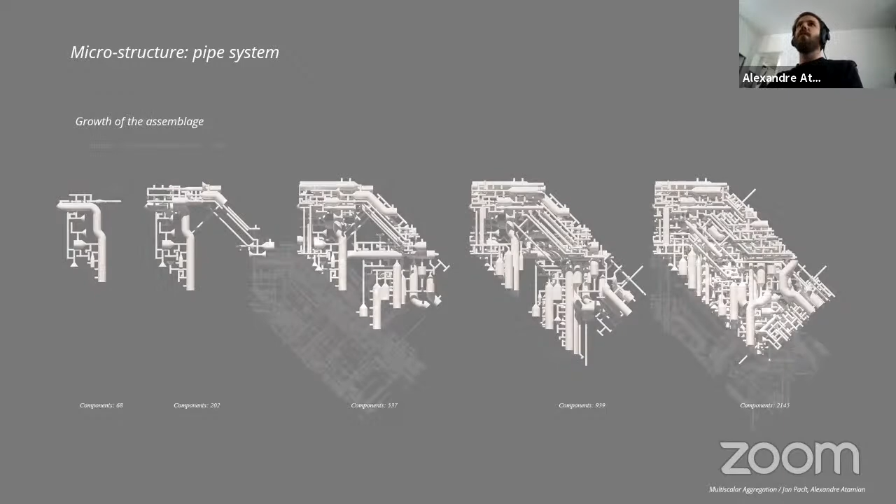Here you see a bit more about the process. I used two constraints basically. The first one is a container in which the pipes can evolve, and they cannot go outside of this. This gives the overall shape.

The other is a vector field that is influenced by a curve that you can see, and that way I can more or less manage the orientation of the pipes.

Sometimes I can get some more chaotic assemblage, but the interesting thing is that I can always have some clean interfaces at the edges. So what you see here, the pipes always arrive in this direction, but in the middle they are well aligned, and here it's a bit more chaotic with other angles.

This gave me the possibility to work in really 3-dimensional space, and to have this difference of density and chaotic organization, but at the same time with quite a regular structure and some patterns that emerge when you give a closer look at what happens in those forms.

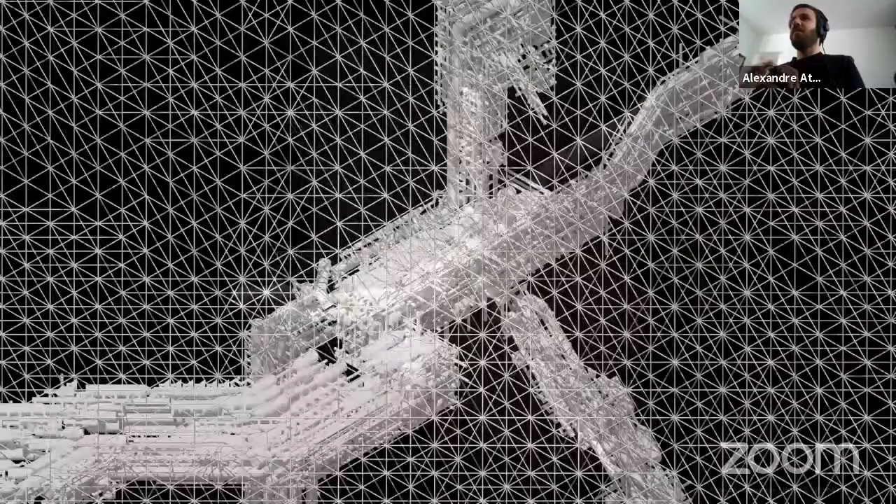We have this interconnection with the very dense and compact pipe structure that gives some direction, and that can give you a sense of space into this grid 3-dimensional structure. Now you can see, sorry for the context, we are a bit more on the spatial station side maybe, but here you see the scale with the human figure—this very big and light structure, and this huge pipe that goes in.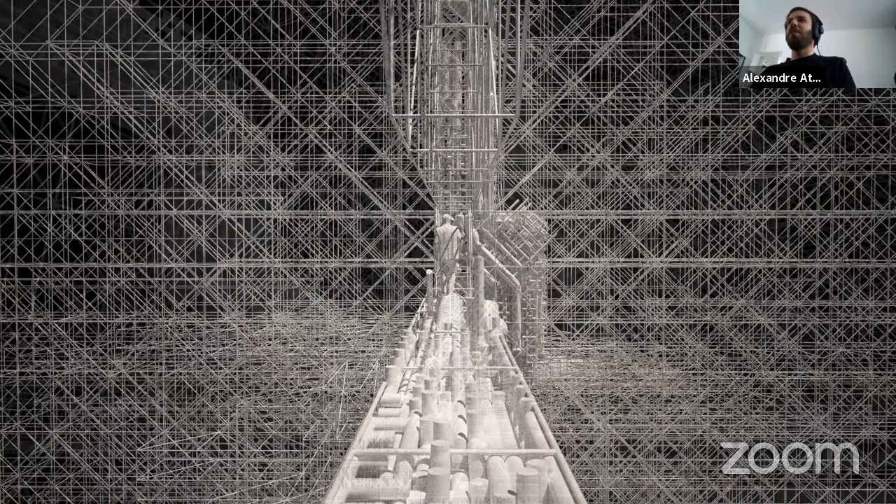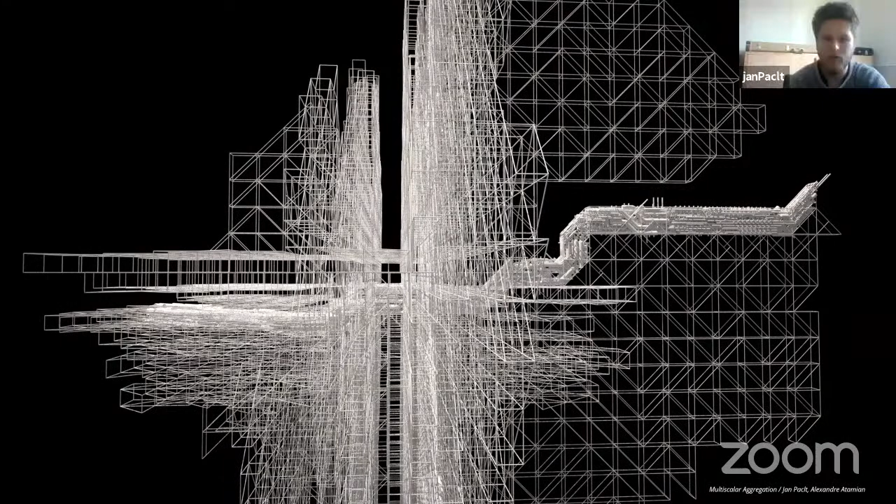And so here you see a bit more about the moire effect that Jan was looking for in his research. Yeah, maybe I can share the screen with the small video I made.

So I was looking for this moire effect when lines overlap. That was also the visual intention, and I wanted to explore if that works with this geometry. I wanted to create more patterns with the geometry and maybe also play with other stuff like field, to make maybe more spatial macrostructure. But yeah, that's where we got.

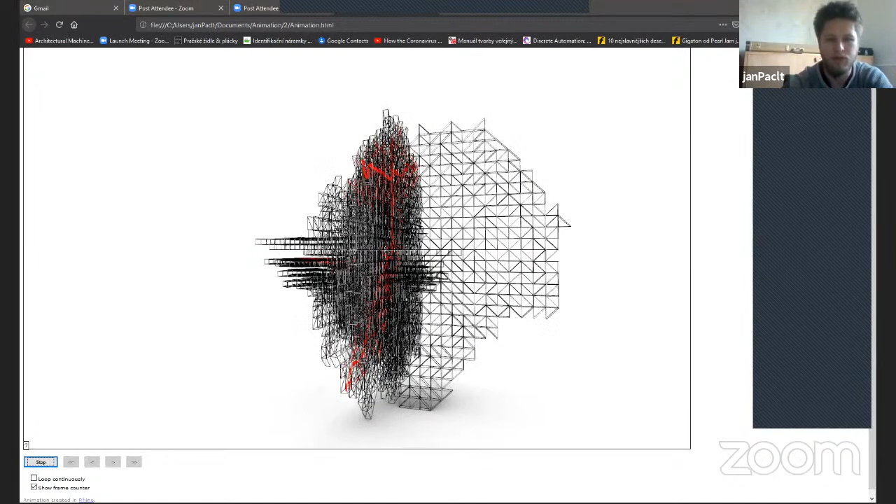Yeah, that's it. Maybe I'll stop the animation now and we can come back to the presentation. Well, anyway, it's the end. Okay, thank you very much.

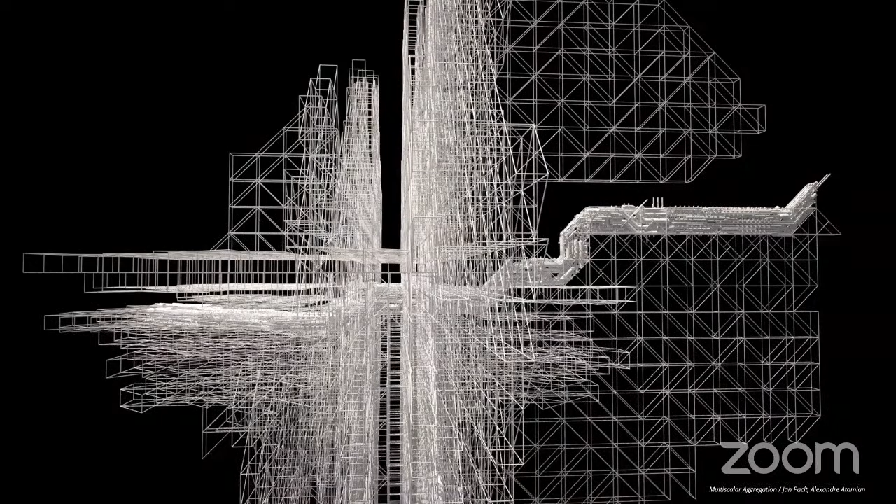No, I think it's very interesting work, and I think you have some very intriguing structures at the end, also in visual terms, that are quite new to me in this context of discrete aggregation, especially with this kind of space frame filled by these very dense volumes. That is quite new as a grammar, so that is very interesting. I really appreciate this idea of multi-scalar aggregation, and that is something that for sure is intriguing, and in this case you already have some very pretty neat results. I was just wondering if there would be a possibility.

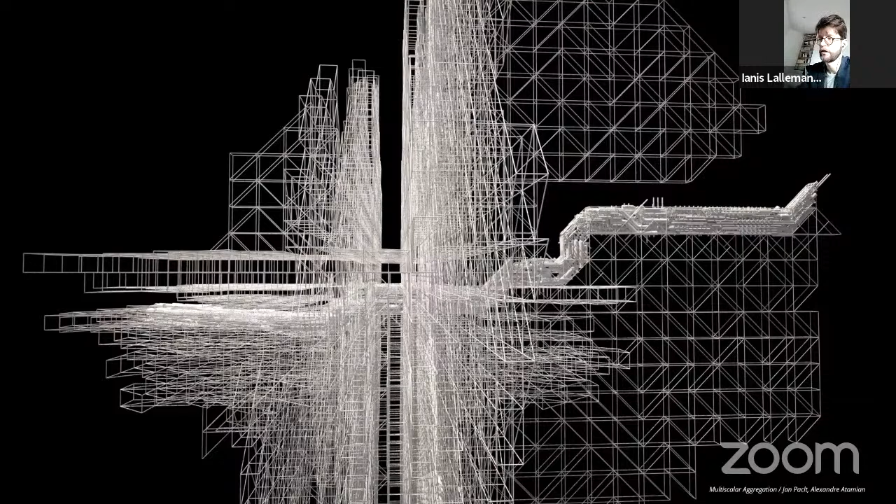To have this coming from a single system, not by means of a recursion procedure or feedback, not as one system which becomes a guiding area for another - which is interesting, not dismissing the approach you had, and I understand it was also a way to work in two directions and unite things. But have you thought about the possibility of having one system where, maybe because the components have different scales, or because of the capacity to assemble, they could work as both containers and microstructure? Is that something you've thought about, or that could be developed?

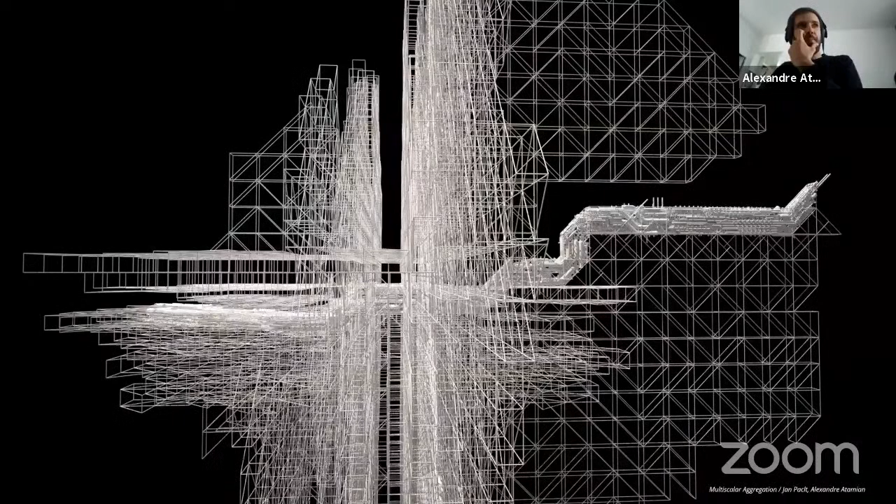Actually, we pretty quickly got into the approach we presented today. First, both of us had some quite specific topics we wanted to develop. So it was basically what connects us is that we work with linear elements. But otherwise, yes, this was a way to separate the work, and also to have a complementary work. But we didn't really think about the way to get these different kinds of scales with the same element.

Like a fractal or a recursive technique, as you could say. And I would say that, in my personal point of view, this wasn't really the direction I wanted to take. I was really interested by this - I had really this kind of drawing in mind. If I want to work... no, it won't work. So, sorry.

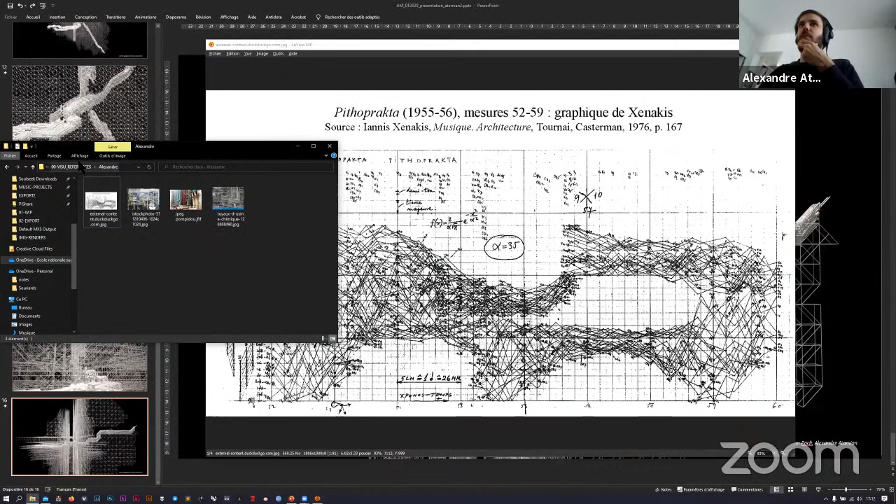If I can - yeah, this kind of global movement, defined by a granular approach with all of these small particles. This is the kind of stuff I was interested in, and Jan's references were more about some very light structures and scaffolding systems with this. Yeah, it wasn't the latest references that he had.

But so, yeah, of course, we could have, for instance, taken the scaffolding system and recursively divided all the cells at a very dense approach to get this kind of density we had. But yeah, this is just another approach we decided to take.

Just to finish quickly - you can think of it as fractal-like, but I don't think that's the most interesting way of thinking about it. You could also see it as a way, if you have a system with multiple connection options and opportunities, then if you take the structure and divide each cell, of course you're going to get something that is in a way very repetitive and very invariant with the scale. But I think we could also think of a way of introducing variation and maybe enabling some heuristics as you subdivide it.

So I'm not really thinking of it as taking a large unit and dividing it in places, but maybe as a way to have some kind of initial attribution of elements, and then you switch to another kind of resolution and introduce other heuristics. But this is just some thoughts. The work is very good, and really, I'm really impressed. I really appreciate it.

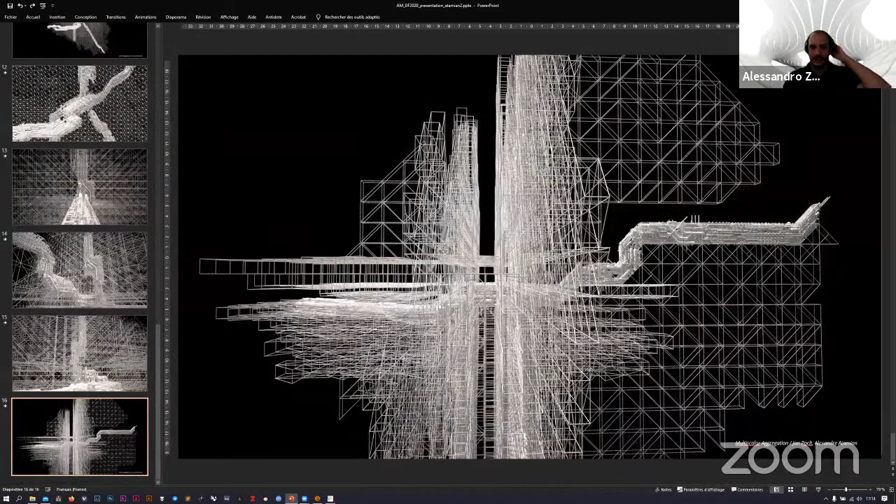Thank you. Well, I think it's an impressive work. Really, I think it's really interesting. It seems like a Centre Pompidou on steroids to me. And the images are really nice.

I was wondering what would be a possible functional implementation of this kind of system, for example the work on the pipes. It's interesting because you can really see the field you use to inform the system. It's not clear to me if the variation from a small to large pipe is something you can control and how you're driving it, or if it just emerged according to which component you had before.

So I'm thinking what would be a possible functional use of this approach — if it could be something structural, a system of paths or roads for cars or any vehicle, or just a system of pipes to drive some fluid. I'm wondering which properties of this object make it useful for some practical application, because aesthetically it's really interesting, but I'm wondering how we can quantify those properties and use them for a proper design.

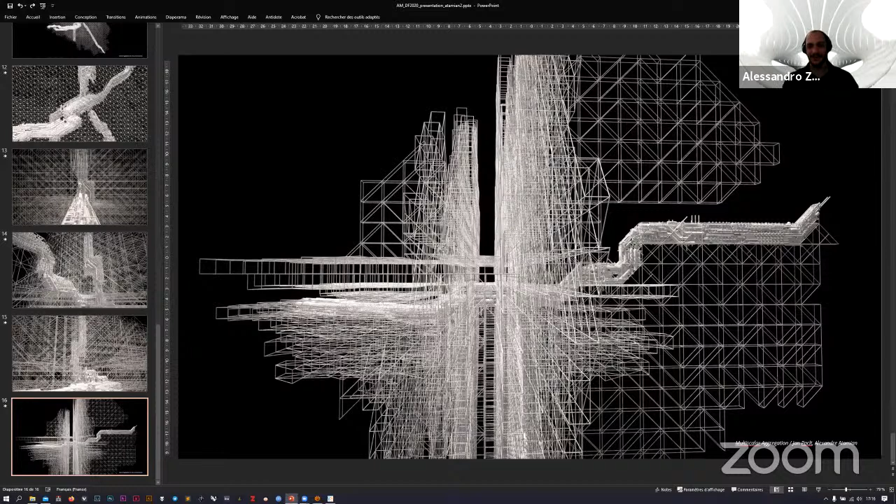Actually, for the dense pipe structure, I really wanted to manage quite precisely the density of the pipes — to get some areas where there were really few pipes, or some thinner ones, etc. But it turned out to be pretty hard to do with the current state of the tool we were using. So in the future I think I'll get more into the code, and I'll follow the evolution of this tool.

Right now the repartition of big pipes or small pipes is pretty random, but we can see that the big pipes appear where the vector field has a 45-degree angle, because there's only one small connection with a 45-degree angle and one connection for the big pipe with that angle. So it can choose between two connections, whereas on straight lines it can choose from a lot more connections for the small diameter, so there's more chance it takes the small diameter.

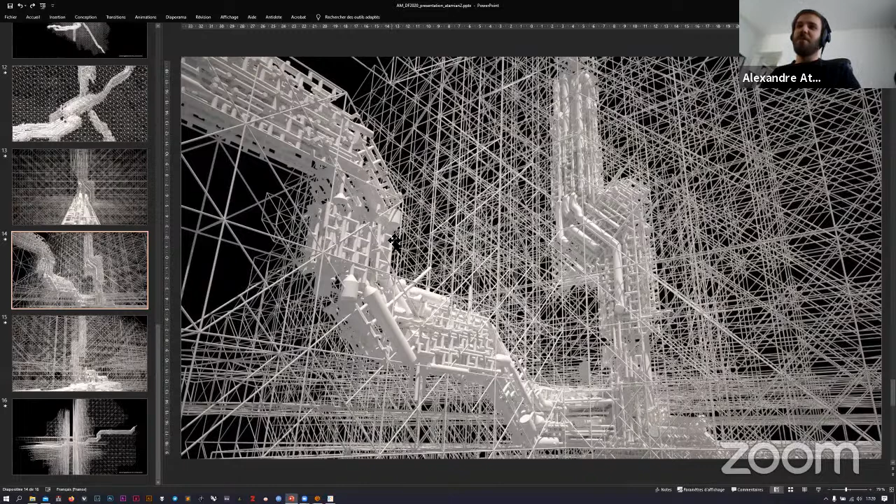Yes, and actually the idea came from a project I was working on as a freelancer for a construction company with a research and development department. They developed a technique where they assembled very standard PVC pipes and filled them with concrete, so they could make structures — they built some bridges, small ones. It worked, and the evolution of this was to use fiber-reinforced concrete, so that's a possible evolution, maybe.

Well. Yes, definitely. Maybe I can add also something to the questions.

What I really appreciate is that we could actually work together on the same thing at different levels simultaneously. I think this tool is really good for that, because you can still reference every point in the design and hold the overall address book of all the places. So we could easily communicate, even though we had to video call and stuff — that's also my answer to why those systems are dislocated.

They are not merged together that much, but I think in real life, like in a building, there are many systems which are not physically related. They are not physically connected, or only at small points. They have different logics, but they need to be combined in the space. So actually I really appreciate this work together, that we could work in the same tool on different levels of scale. So yeah, that's what I learned from the workshop most. Yeah, thanks, Jan.

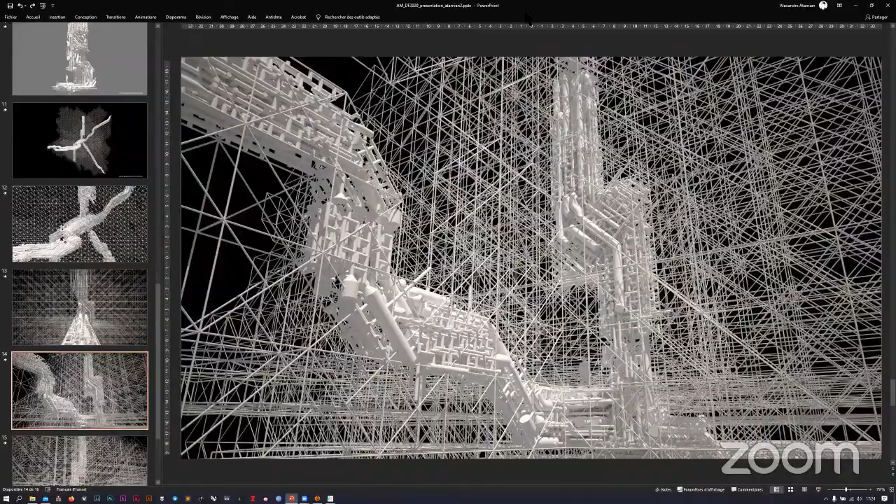I would like to make a general commentary right now because all the projects that have been presented have been very successful for the workshop's sake, for what were at least my intentions when I decided to do this workshop. So I would like to congratulate collectively all of you for the efforts you have done, for the results you have achieved in these few days, for the fact that I threw at you something that was also a lot experimental, incomplete, work in progress, but still you managed to dig through and did something very, very interesting with it. And I'm also really impressed by the variety. So I'm really happy that I didn't force on you the perspective that I had in mind at the beginning, because that paid back a lot to me in terms of results.

In some cases, it looks like some of the results are coming even from different workshops, if you look at it in retrospect, and you didn't expose the process. So to me, that is a quality.

So I'm very happy. The only thing I would like to stress is the fact that, especially for those who have to work in couple, double praise, because you have to work in team at a distance, remote, with all the difficulties of this. Because during a workshop, the fast interchange of ideas when you are in person, you know how it is. It's a lot different, it's a lot better. So it was also an extra effort from your side, and I really appreciate that a lot. Believe me, a lot.